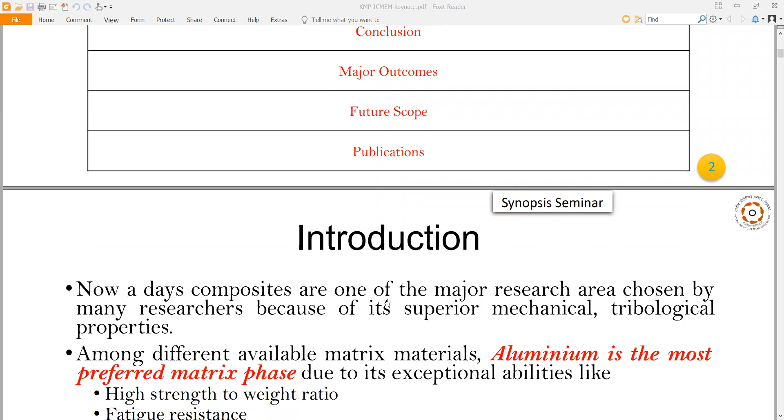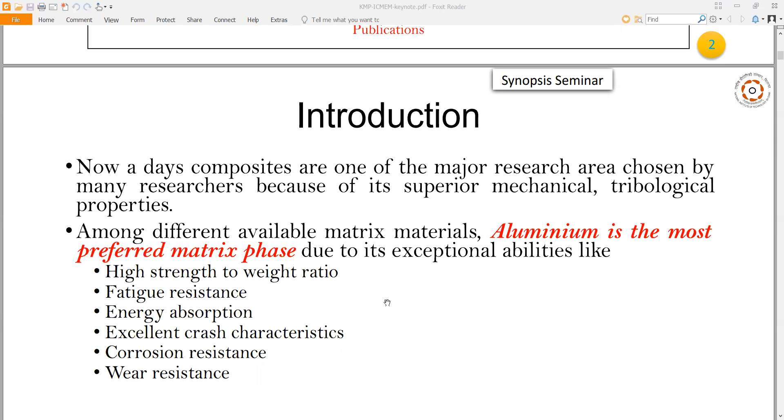In the introduction, nowadays composites are one of the major research areas chosen by many researchers because of their superior mechanical and tribological properties. Among different available matrix materials, aluminum is the most preferred matrix due to its exceptional abilities like high strength to weight ratio, fatigue resistance, energy absorption, excellent crash characteristics, corrosion resistance, and wear resistance.

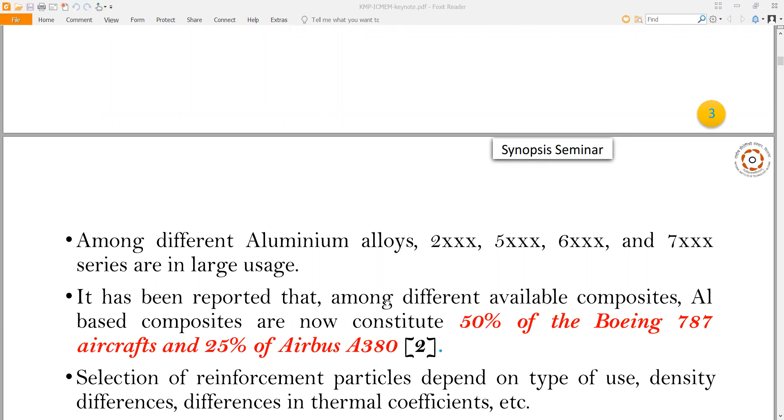Among different aluminum alloys, the 2XXX, 5XXX, 6XXX, and 7XXX series are in large usage. It has been reported that among different available composites, aluminum-based composites now constitute 50% of the Boeing 787 aircraft and 25% of Airbus A380.

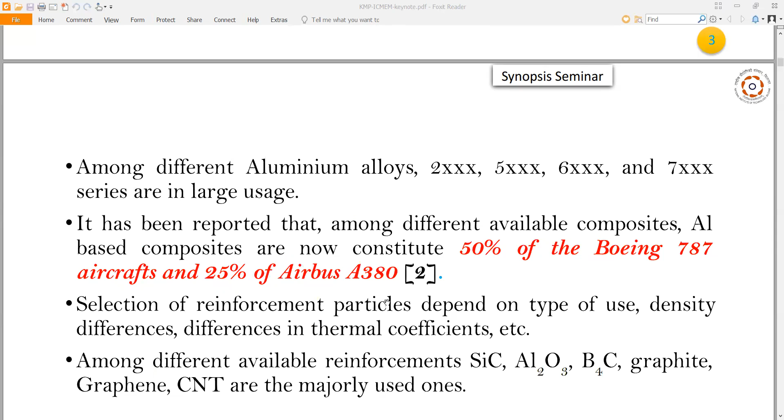Selection of reinforcement particles depends on type of use, density differences, differences in thermal coefficients, etc. Among different available reinforcements, silicon carbide, Al2O3, B4C, graphite, graphene, and CNT are the majorly used ones.

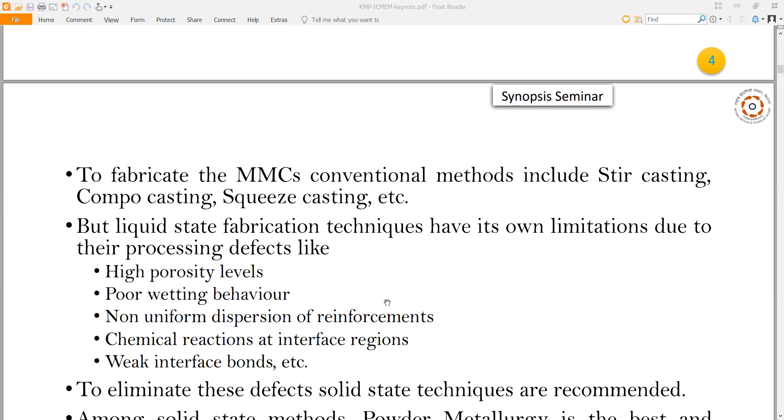To fabricate the MMC, that is metal matrix composites, conventional methods include stir casting, compo casting, squeeze casting, etc. But liquid state fabrication techniques have their own limitations due to processing defects like high porosity levels, poor wetting behavior, non-uniform dispersion of reinforcements, chemical reactions at interface regions, weak interface bonds, etc.

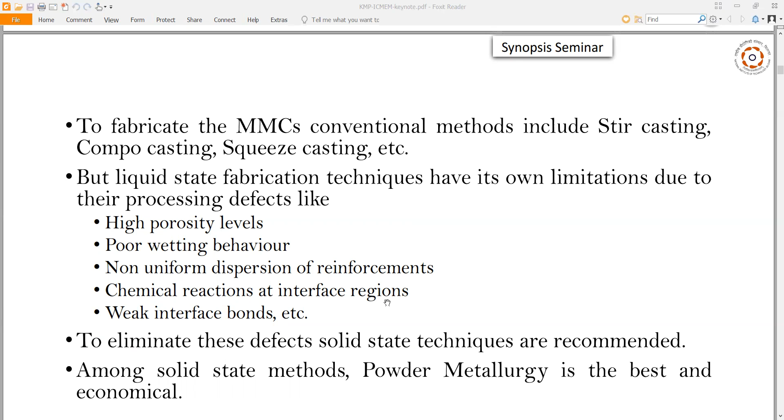To eliminate these defects, solid-state techniques are recommended, and among solid-state methods, powder metallurgy is the best and most economical. This work has recently been given as a synopsis seminar by one of my PhD students, and I am taking it as it is due to paucity of time, so I could not prepare separately. This is recent work, and I am presenting this to show what research we are doing now in our department.

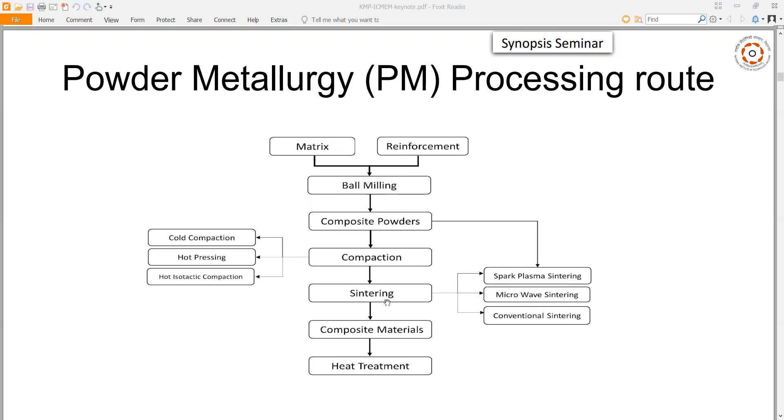Then powder metallurgy, that is the PM processing route. This diagram shows powder metallurgy: matrix, then reinforcement, then ball milling, then composite powder, then spark plasma sintering, microwave sintering, or conventional sintering, and compaction, then sintering, then composite material, then heat treatment. Cold compaction is there, hot pressing is there, then hot isostatic compaction is there.

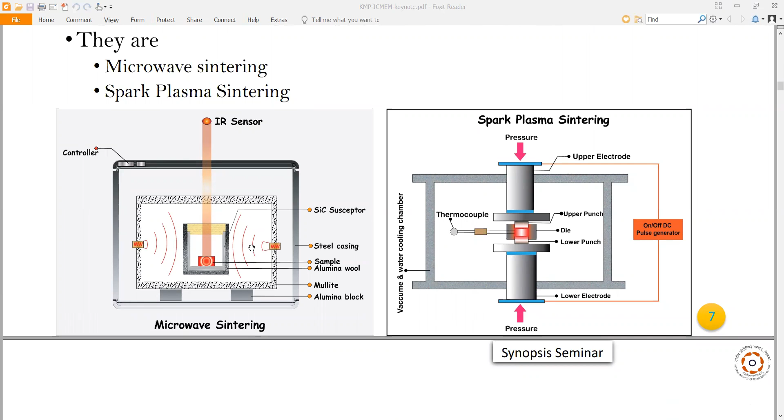Then non-conventional sintering mechanisms. To eliminate major defects in conventional sintering techniques, non-conventional sintering techniques will help effectively. They are microwave sintering and spark plasma sintering. This diagram shows microwave sintering, and this one shows spark plasma sintering.

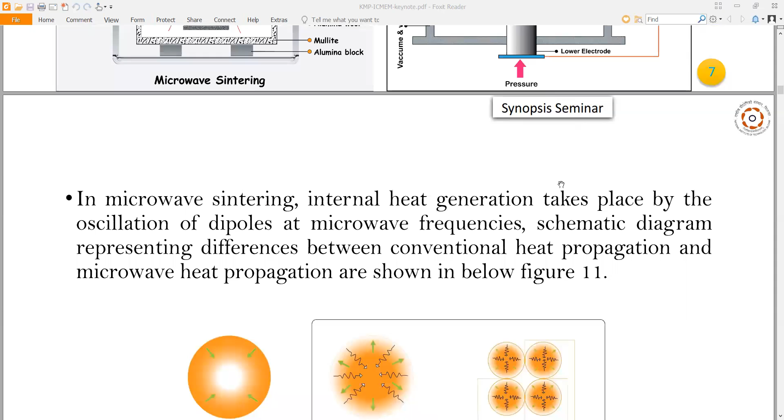In microwave sintering, internal heat generation takes place by the oscillation of dipoles at microwave frequencies. A schematic diagram representing differences between conventional heat propagation and microwave heat propagation is shown in figure 11 below. You can see it very well.

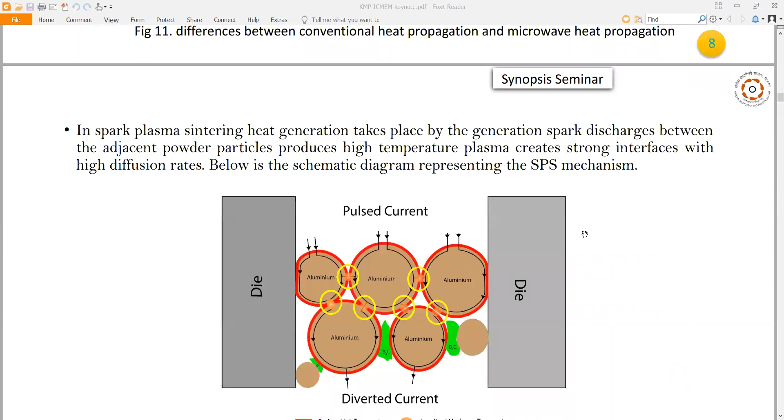In spark plasma sintering, heat generation takes place by spark discharges between adjacent powder particles, producing high temperature plasma and creating strong interfaces with high diffusion rates. Below is the schematic diagram representing spark plasma sintering, showing pulse current, die, and diverted current.

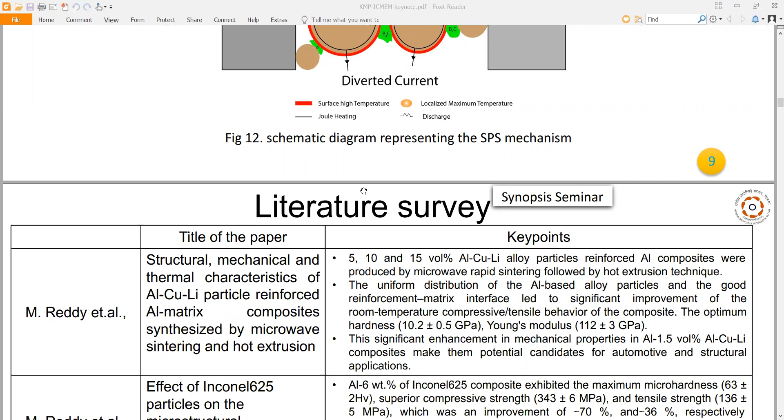Then literature survey. This is all about the literature review we have done. There is a lot of literature available in this area, so I will skip and not speak about all this because the audience will feel bored. All of it is available at sciencedirect.com, so I will be happy to skip this thing.

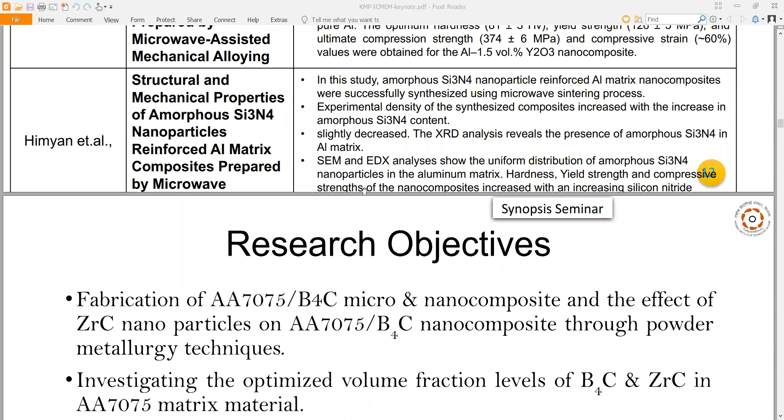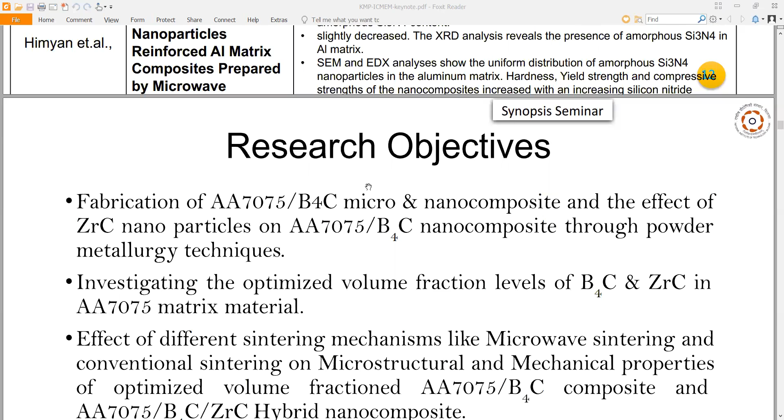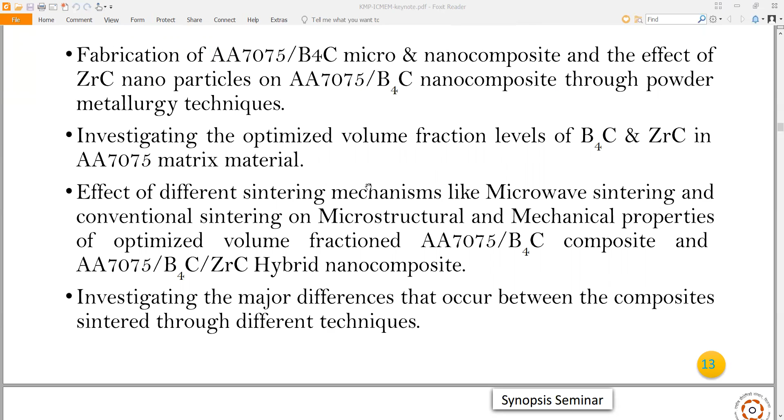Our research objectives are as follows: fabrication of AA7075/B4C micro and nano composite, and the effect of ZrC nanoparticles on AA7075/boron carbide nano composite through powder metallurgy technique; investigating the optimized volume fraction level of B4C and ZRC in AA7075 matrix material; effect of different sintering mechanisms like microwave sintering and conventional sintering on microstructural and mechanical properties of optimized volume fraction AA7075/B4C composite and AA7075/B4C/zirconium carbide hybrid nano composite; and investigating the major differences that occur between composites sintered through different techniques.

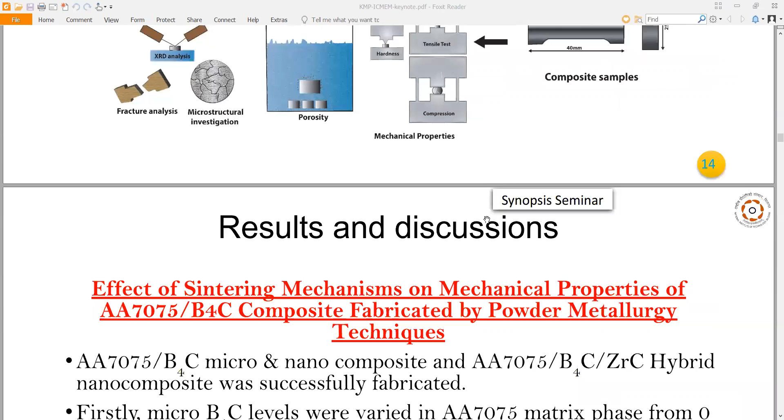Then research methodology: ball milling, cold compaction, microwave sintering, composite samples, mechanical properties, porosity, fracture analysis, and microstructural investigation. And this is about results and discussion.

So for results and discussion, we should first discuss the effect of sintering mechanism on mechanical properties of AA7075 B4C composite fabricated by powder metallurgy techniques.

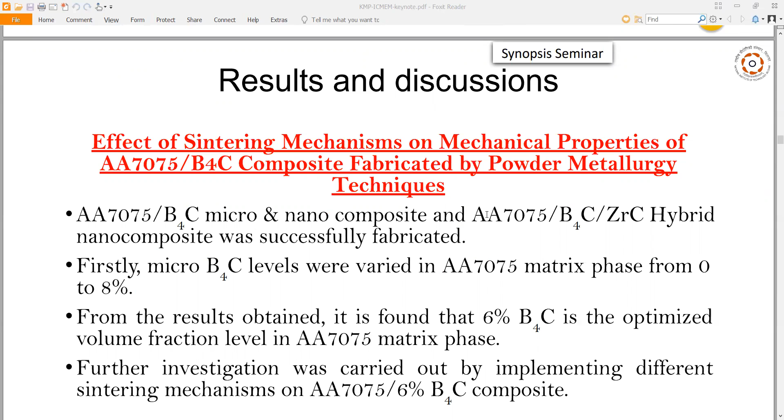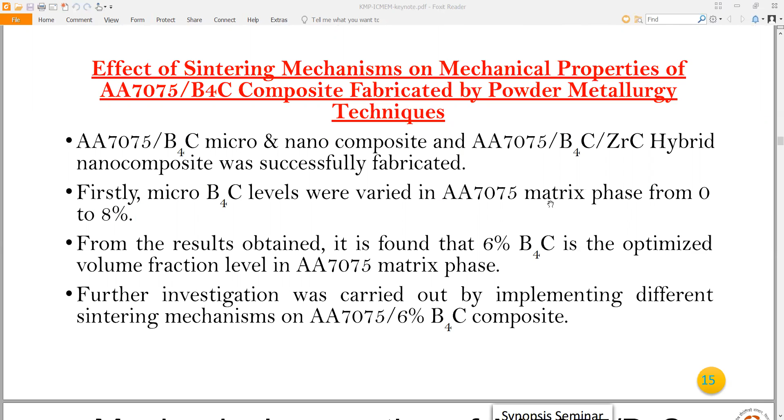AA7075 B4C micro and nano composite and AA7075 B4C ZrC hybrid nanocomposites were successfully fabricated. Firstly, micro B4C levels were varied in AA7075 matrix phase from 0 to 8%. From the results obtained, it was found that 6% B4C is the optimized volume fraction level in the AA7075 matrix phase.

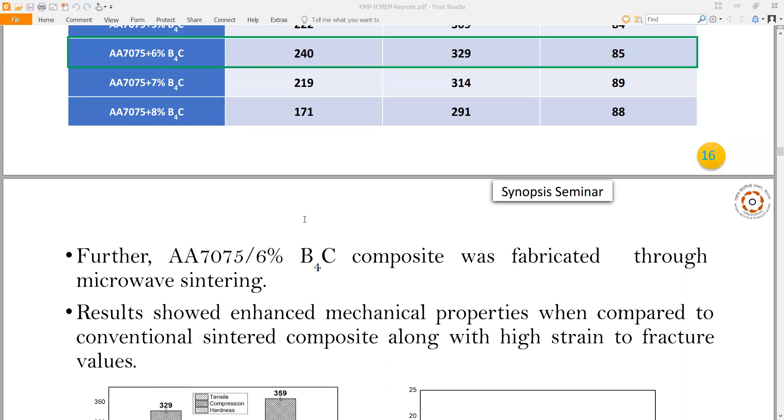Further investigation was carried out by implementing different sintering mechanisms on AA7075 6% B4C composite. We can see the name of the composite, tensile properties in MPa, compression properties in MPa, and hardness. The composite was fabricated through microwave sintering and results showed enhanced mechanical properties compared to conventionally sintered composite, along with a high strain to fracture value.

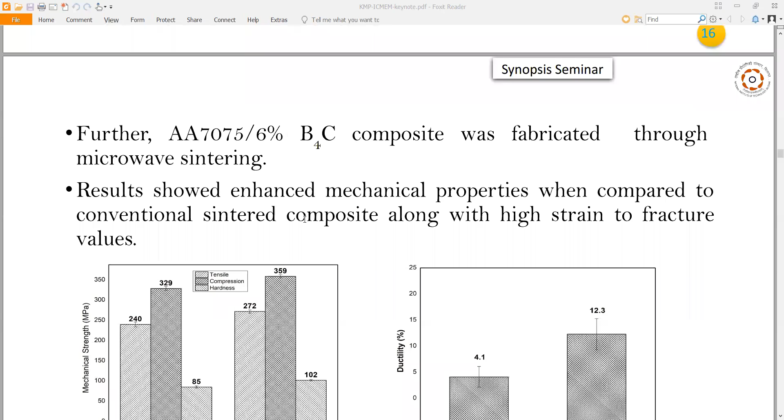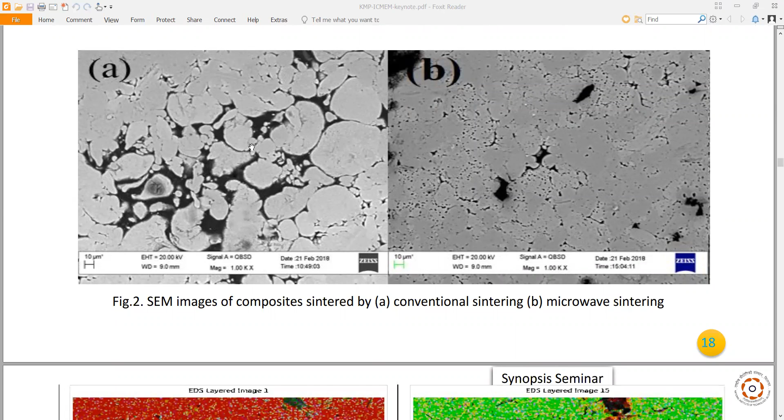Here we can see the diagram showing SEM images of the composite sintered by conventional sintering and microwave sintering. This is conventional sintering and this is microwave sintering.

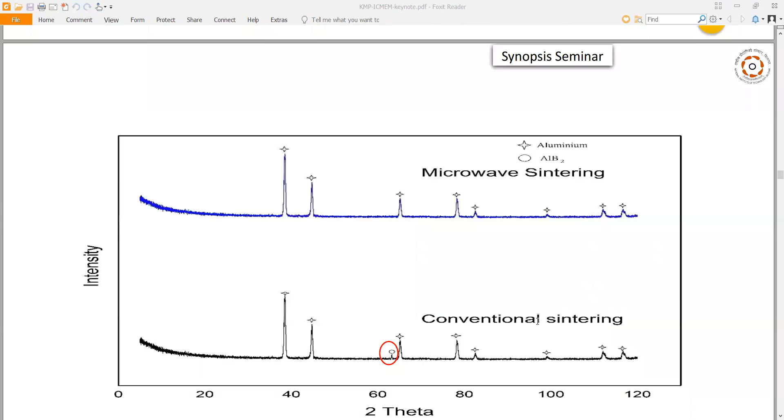This is XRD analysis of composites sintered by two different techniques. Here is the conventionally sintered product and here is the microwave sintered product.

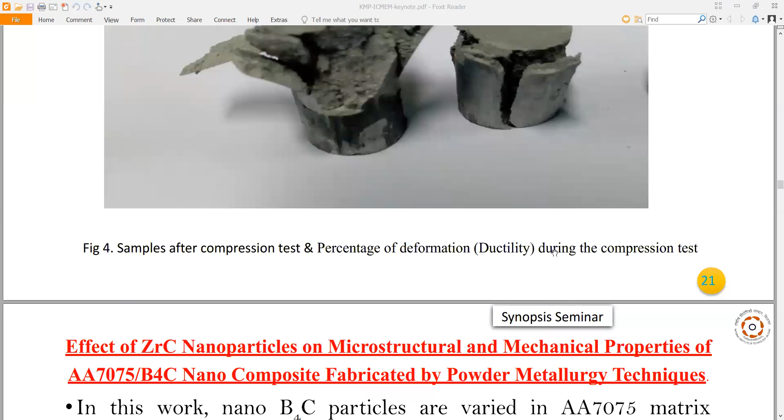This is figure 4, showing samples after the compression test and the percentage of deformation ductility during the compression test.

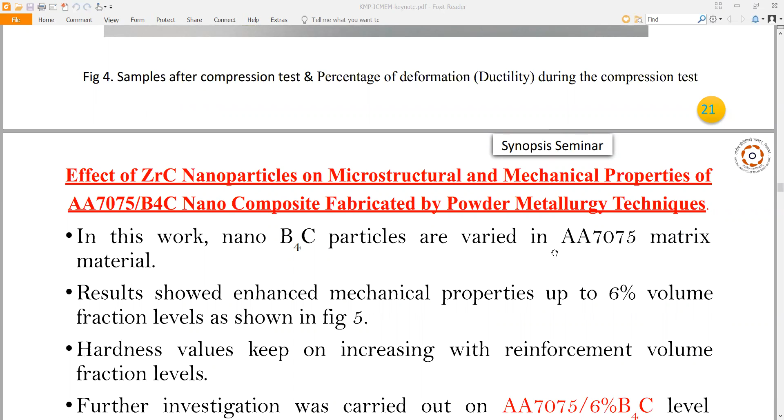Next we studied the effect of ZrC nanoparticles on microstructural and mechanical properties of AA7075 B4C nanocomposite fabricated by powder metallurgy technique. In this work, nano B4C particles were varied in the AA7075 matrix material.

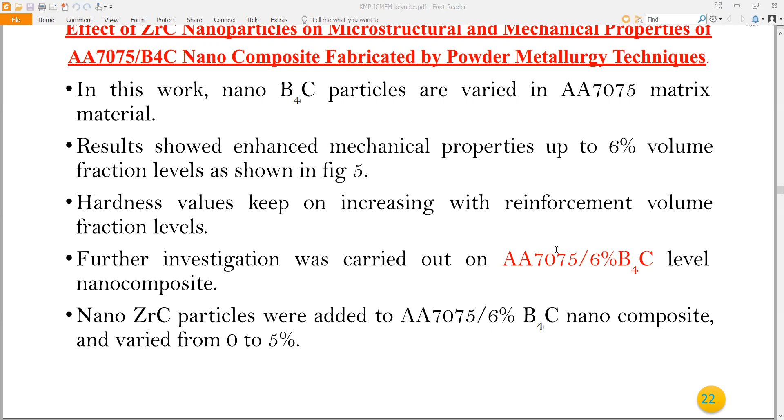Results showed enhanced mechanical properties up to 6% volume fraction level as shown in figure 5. Hardness value kept on increasing with reinforcement volume fraction level. Further investigation was carried out on the AA7075 6% B4C level composite, and nano ZrC particles were added to AA7075 6% B4C nanocomposite, varied from 0 to 5%.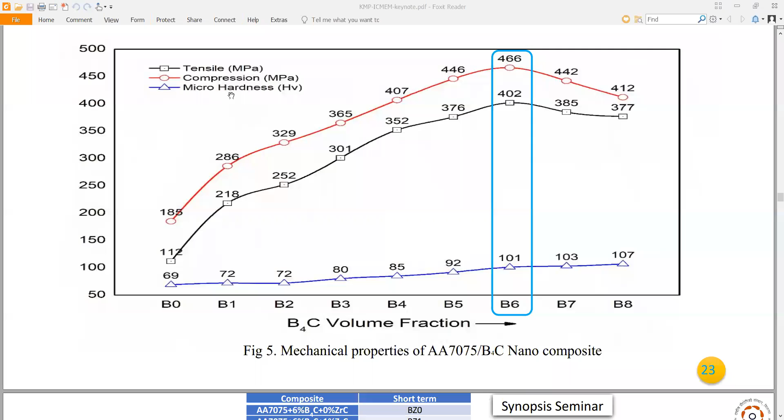This is shown with this blue color. Here also these composites are shown, with compressive and tensile strength versus zirconium carbide volume fraction of the composite shown here.

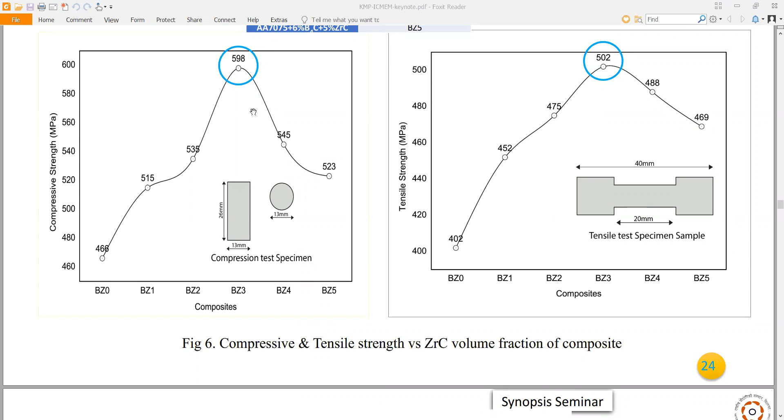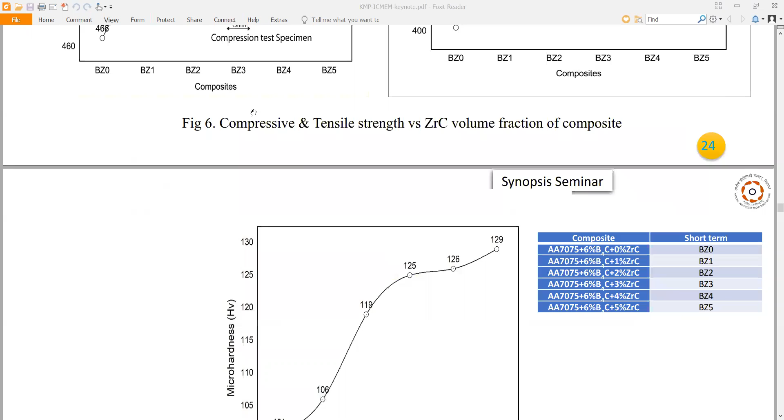Then this is the short term name of the composite that has been used, and this is about micro hardness versus zirconium carbide volume fraction of the composite.

So what is the conclusion? We have arrived that micro hardness keeps on increasing with ZrC volume fraction.

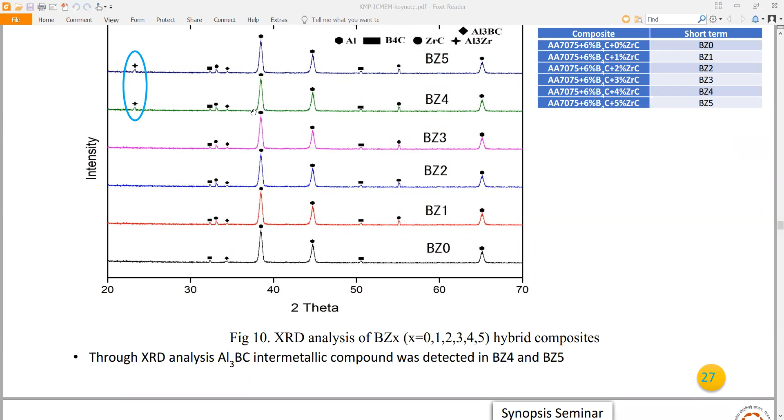This is figure 10, the XRD analysis of B-Z-X, where X is equal to 0, 1, 2, 3, 4, 5 percent, for the hybrid composites. From the XRD analysis, Al3BC intermetallic compound was detected in BZ4 and BZ5.

This is the fractographic analysis. Here we can see the fracture surfaces of AA7075 plus 6% B4C plus X% ZrC hybrid nanocomposites, where X is equal to 1, 2, and 3.

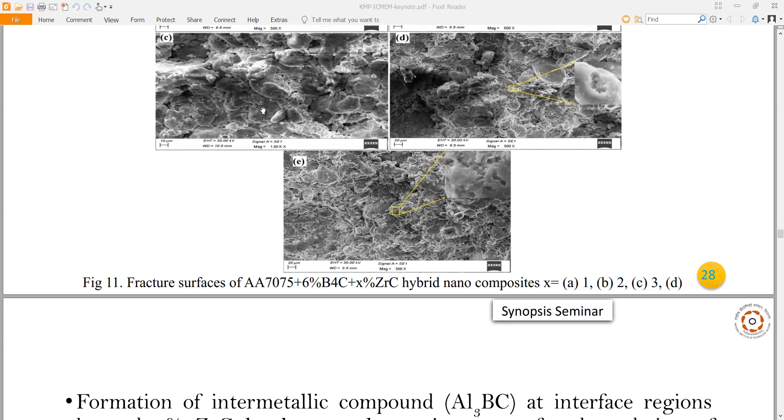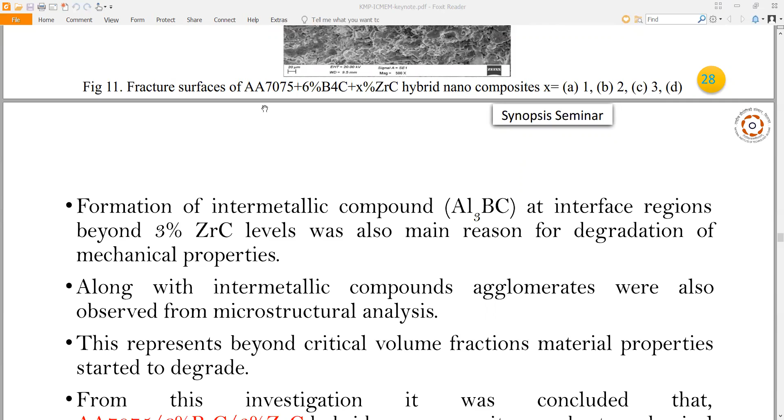We see the formation of intermetallic compound Al3BC at interface regions beyond 3% ZrC levels was the main reason for degradation of mechanical properties. Along with intermetallic compounds, agglomerates were also observed from microstructural analysis. This represents that beyond the critical volume fraction, material properties start to degrade.

From this investigation, it was concluded that AA7075 6% B4C, 3% ZrC hybrid nanocomposite gave the best mechanical properties. So we concluded like this.

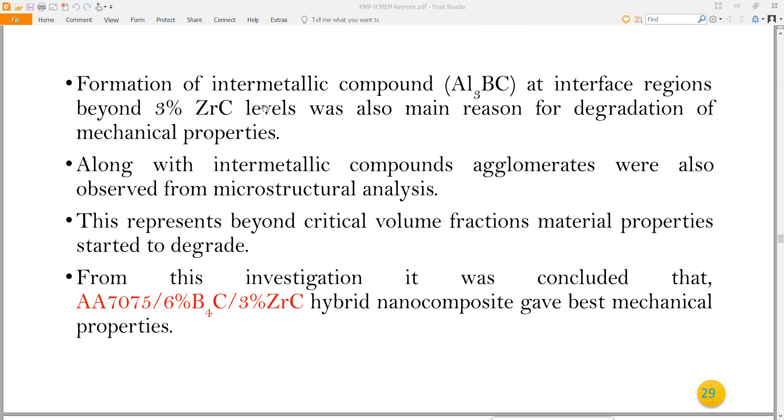Then the third objective was the effect of microwave sintering on the microstructure and mechanical properties of AA7075 B4C ZrC hybrid nanocomposite fabricated by powder metallurgy techniques.

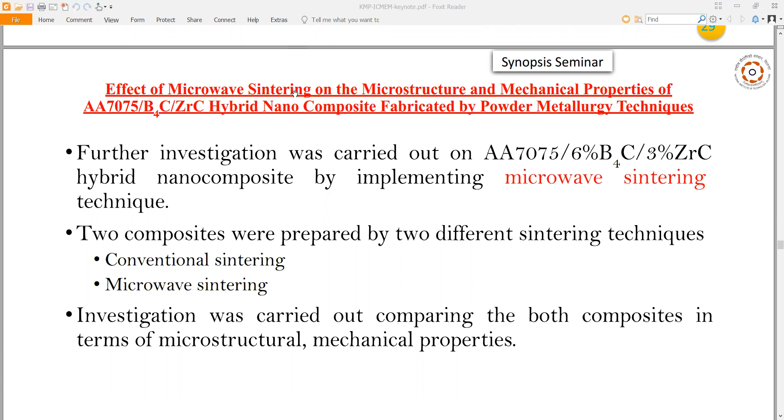Here, further investigation was carried out on this hybrid nanocomposite by implementing microwave sintering technique, and two composites were prepared by two different sintering techniques: conventional sintering and microwave sintering. Investigation was carried out comparing both composites in terms of microstructural and mechanical properties.

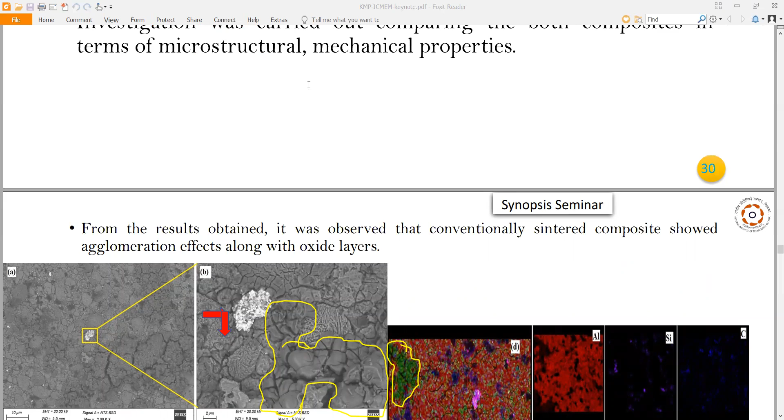From the results obtained, it was observed that conventionally sintered composites showed an agglomeration effect along with oxide layers, which we can see from the figures, specifically figure 12.

These are SEM images. A is the conventionally sintered composite, B is the magnification image of the yellow spot from image 5A, and C shows agglomeration of ZrC and dispersion of B4C.

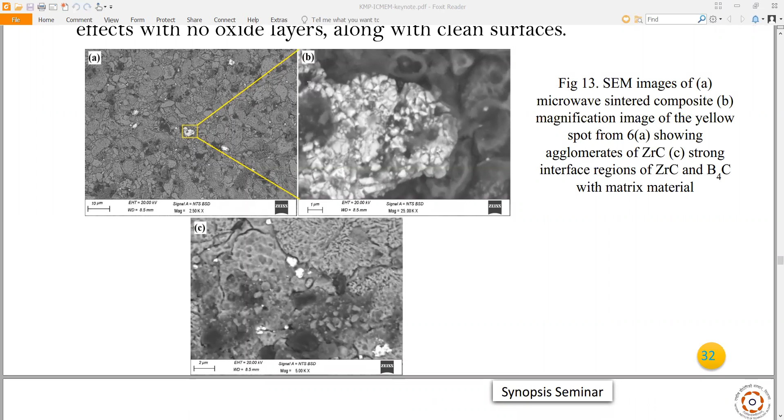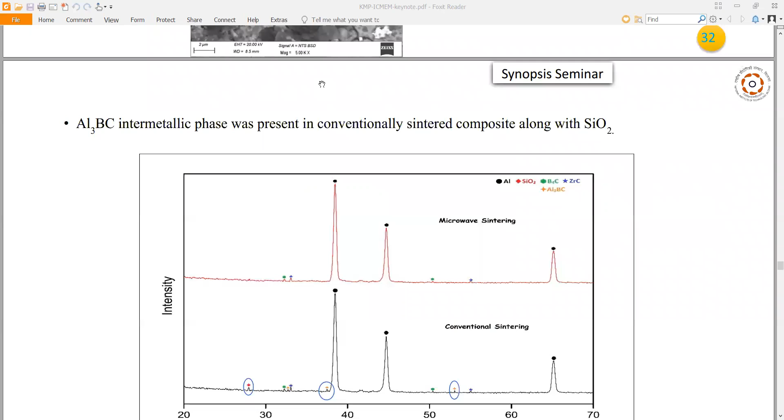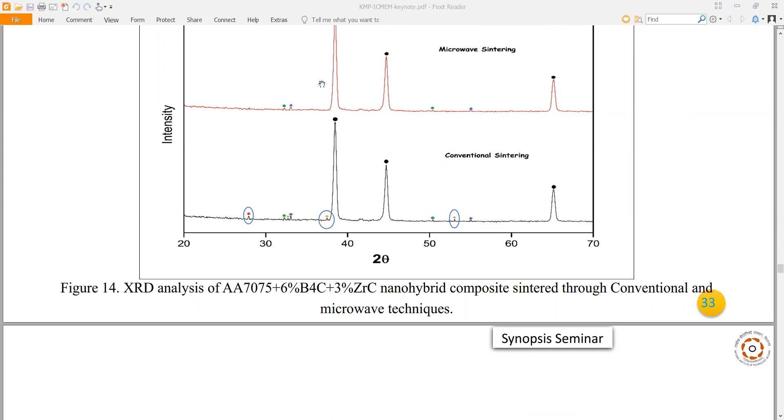This is the diagram, figure 14. This is the XRD analysis of AA7075 plus 6% B4C plus 3% zirconium carbide nanohybrid composite, sintered through conventional and microwave techniques.

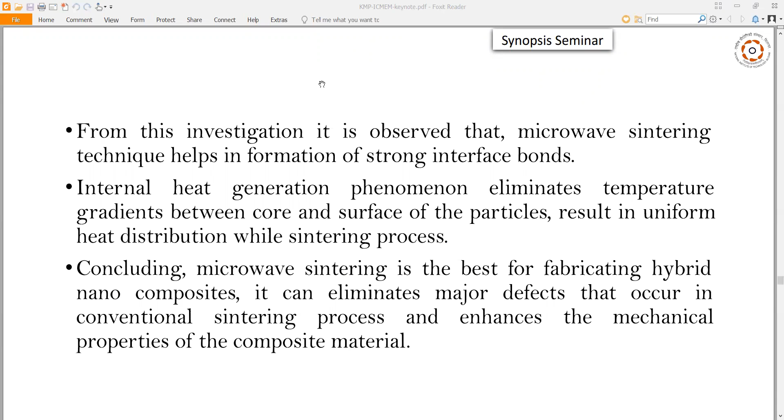It can eliminate major defects that occur in conventional sintering process and enhances the mechanical properties of the composite material. Now this is about comparative analysis of fabricated composites.

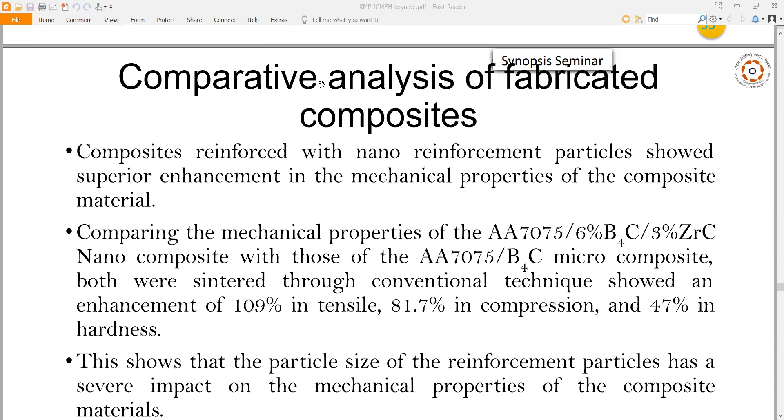Composites reinforced with nano-reinforcement particles showed superior enhancement in the mechanical properties of the composite material. Comparing the mechanical properties of AA7075, 6% B4C, 3% ZrC nanocomposite with those of the AA7075 B4C microcomposite, both sintered through conventional technique, showed an enhancement of 109% in tensile.

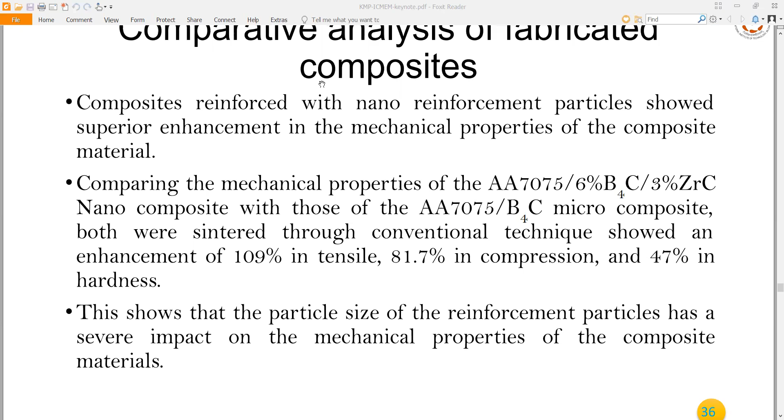81.7% in compression, and 47% in hardness. This showed that the particle size of the reinforcement particle has a severe impact on the mechanical properties of the composite materials.

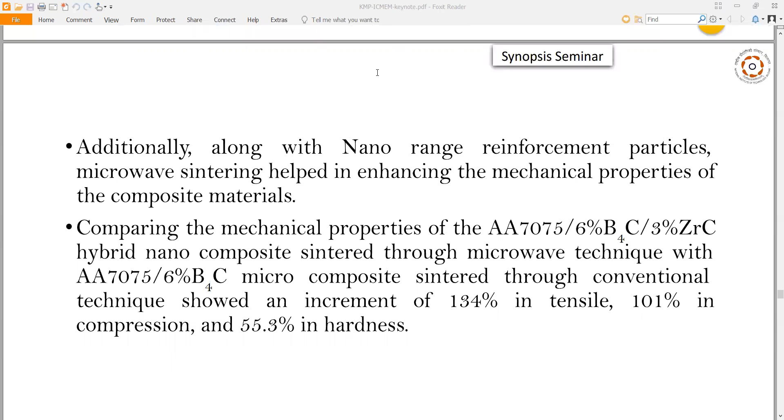Additionally, along with nano-range reinforcement particles, microwave sintering helps in enhancing the mechanical properties of the composite materials. Comparing the mechanical properties of AA7075, 6% B4C, 3% ZrC hybrid nanocomposite sintered through microwave technique with AA7075, 6% B4C microcomposite sintered through conventional technique showed an increment

of 134% in tensile, 101% in compression, and 55.3% in hardness.

The main disadvantage is that composite materials have low ductility nature after reinforcing with high reinforcement content levels.

The present investigation showed that enhanced ductility levels can be achieved by implementing advanced sintering mechanisms like microwave sintering with nano-range reinforcements. Comparing the ductility levels of fabricated composites,

AA7075 B4C ZrC hybrid nanocomposite sintered through microwave technique showed strain to fracture value of 12.2%, while AA7075 B4C microcomposite sintered through conventional technique showed a strain to fracture value of only 4.1%.

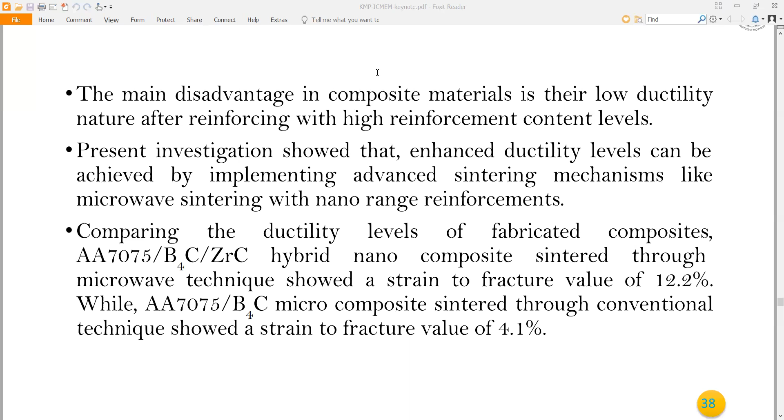So we are getting a large difference. In one place it is 12.2%, and in the other place it is only 4.1%.

These are the diagrams of tensile strength in MPa, compression strength in MPa, and hardness in MPa. This shows the ductility level of composites fabricated in the present work.

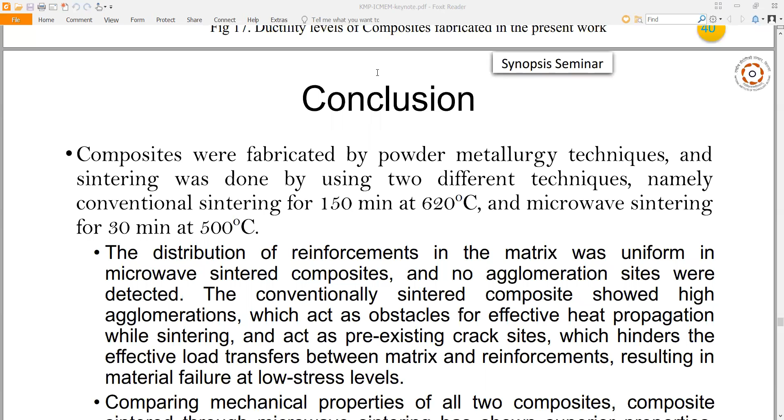In conclusion, now we present the conclusion of our whole work. Composites were fabricated by powder metallurgy techniques, and sintering was done using two different techniques: conventional sintering for 150 minutes at 620 degrees centigrade, and microwave sintering for 30 minutes at 500 degrees centigrade.

The distribution of reinforcement in the matrix was uniform in microwave sintered composites, and no agglomeration sites were detected. The conventionally sintered composites showed high agglomerations which act as obstacles for effective heat propagation during sintering,

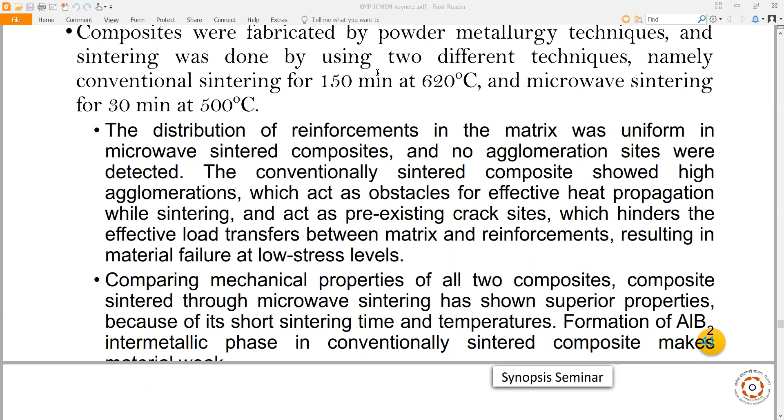and act as pre-existing crack sites, which hinder the effective load transfer between matrix and reinforcements, resulting in material failure at low stress levels.

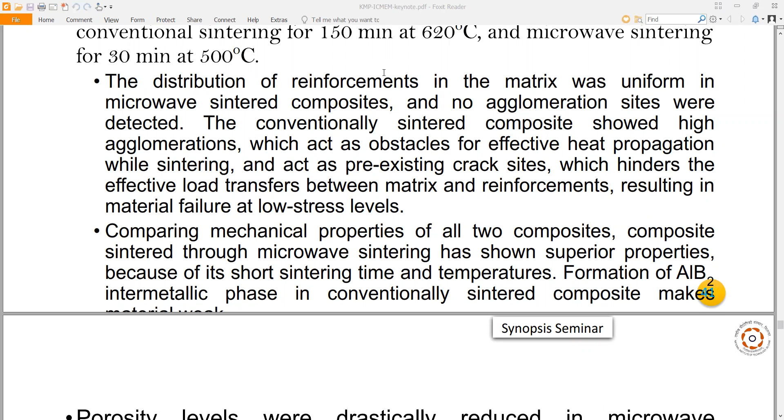Comparing mechanical properties of the two composites, the composite sintered through microwave sintering showed superior properties because of its short sintering time and temperature. Formation of AlB2 intermetallic phase in the conventionally sintered composite makes it inferior.

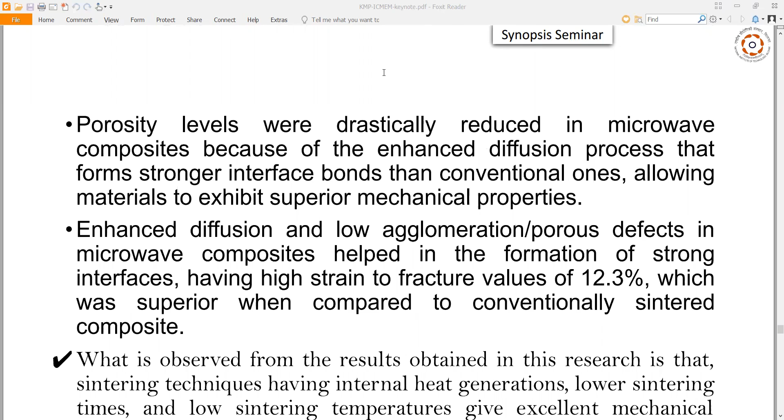Porosity levels were drastically reduced in microwave composites because of the enhanced diffusion process, which forms a stronger interface bond than in conventional ones, allowing materials to exhibit superior mechanical properties.

Enhanced diffusion and low agglomeration porous defects in microwave composites helped in the formation of strong interfaces, having high strain to fracture values of 12.3%, which was superior compared to the conventionally sintered composite.

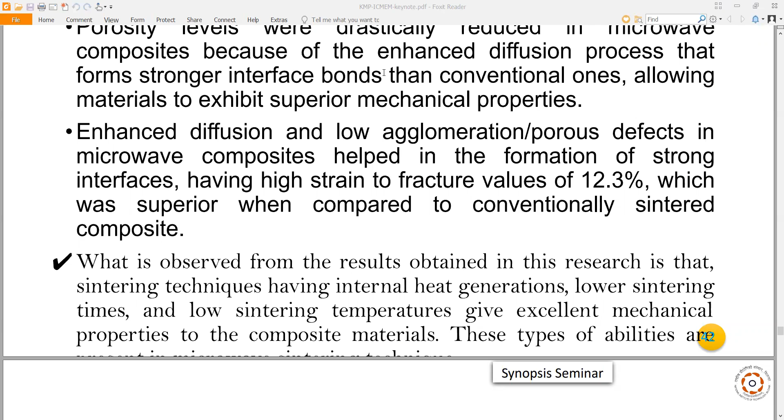What is observed from the results obtained in this research is that sintering techniques having internal heat generation, lower sintering times, and lower sintering temperatures give excellent mechanical properties to the composite materials.

AA7075/B4C/ZrC hybrid nanocomposite was fabricated through powder metallurgy techniques to investigate the impact of nano ZrC particles on microstructural and mechanical properties at the optimized volume fraction.

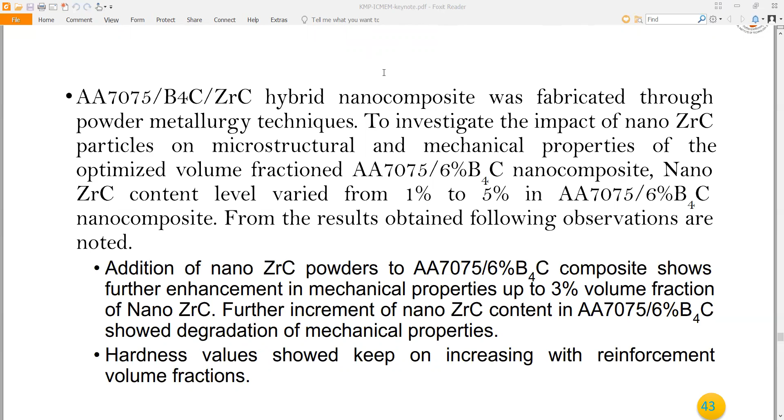In the AA7075/6% B4C nanocomposite, nano ZrC content level varies from 1% to 5%. From the results obtained, the following observations were noted.

With addition of nano ZrC powders to these composites, there is further enhancement in mechanical properties up to 3% volume fraction of nano ZrC.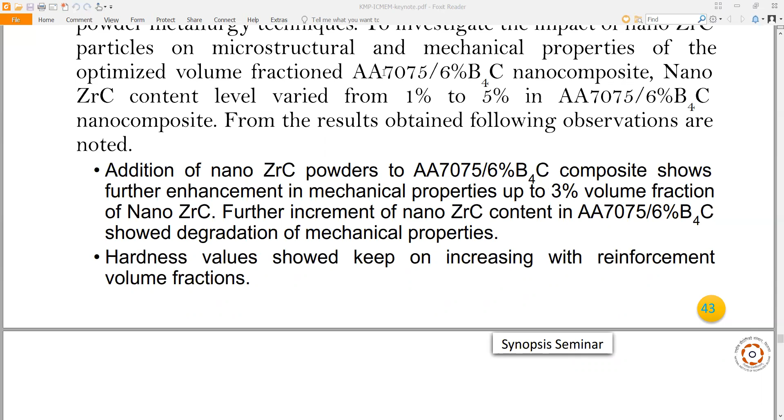Further increment of nano ZrC content in AA7075 6% boron carbide showed degradation of mechanical properties. Hardness values, however, kept on increasing with reinforcement volume fraction.

Next, microstructural analysis revealed that the distribution of nano reinforcement was uniform up to 3% ZRC content level, and further increase in nano ZRC level showed agglomerations of ZRC particles.

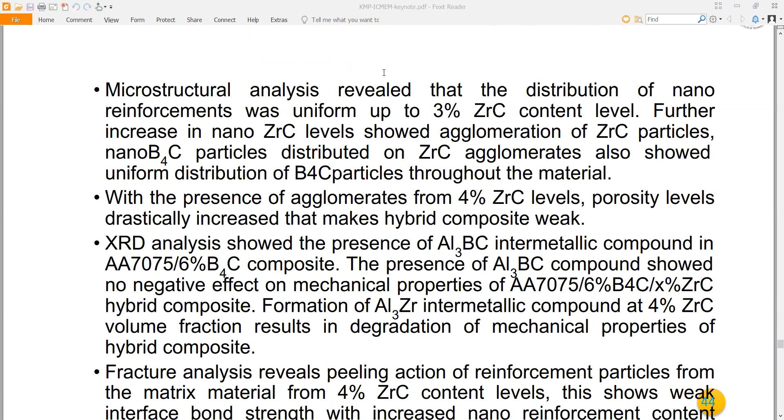Nano B4C particles distributed on ZRC agglomerates also showed uniform distribution of B4C particles throughout the material. With the presence of agglomerates from 4% ZRC level, porosity level drastically increased, making the hybrid composite weak.

XRD analysis showed the presence of Al3BC intermetallic compound in AA7075/6% B4C composite. The presence of Al3BC compound showed no negative effect on mechanical properties.

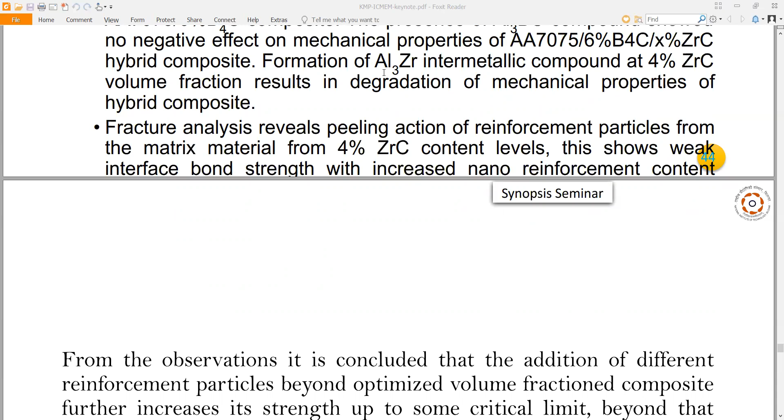Formation of Al3ZR intermetallic compound at 4% ZRC volume results in degradation of mechanical properties of the hybrid composite, but this happens at 4% ZRC. Fracture analysis reveals peeling action of reinforcement particles from the matrix material from 4% ZRC content levels onward.

From the observation, it is concluded that the addition of different reinforcement particles beyond the optimized volume fraction increases composite strength up to some critical limit. Beyond that, composites show agglomerates with high porosity levels along with new intermetallic compounds and weak interface bonds that ultimately degrade the mechanical properties of the hybrid composite.

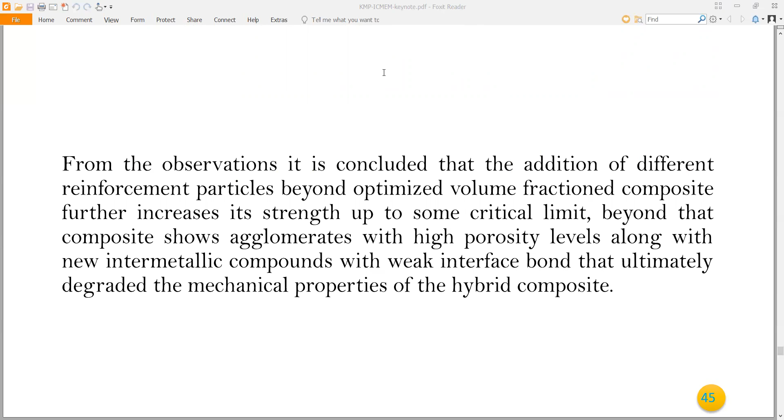AA7075 with 6% B4C and 3% ZRC nano hybrid composites, sintered through conventional and microwave techniques, were fabricated successfully. Various characterizations were performed to find out the advantage of microwave sintering over conventional sintering, and below are the novel findings from the research work.

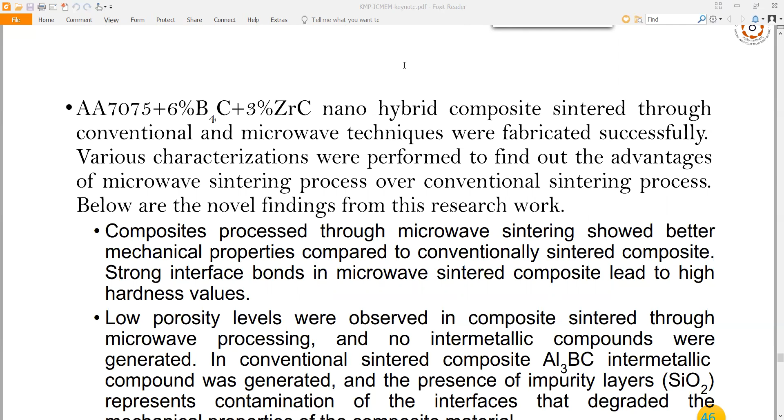Composites processed through microwave sintering showed better mechanical properties compared to conventionally sintered composites. Strong interface bonds in the microwave sintered composite led to high hardness values, and low porosity levels were observed in the composite sintered through microwave processing. No intermetallic compounds were generated. In the conventionally sintered composite,

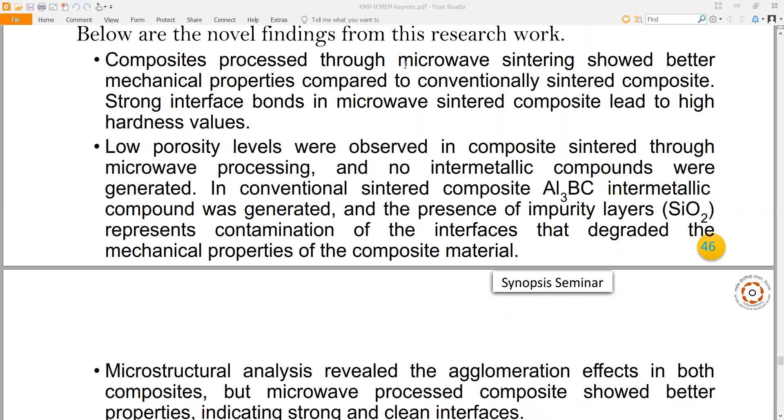Al3BC intermetallic compound was generated, and the presence of impurity layers, SiO2, represents contamination of the interfaces that degraded the mechanical properties of the composite material.

Microstructural analysis revealed agglomeration effects in both composites, but microwave processed composites showed better properties, indicating strong and clean interfaces. No peeling action of reinforcement particles from the matrix material was detected in either composite, as shown through SEM fractography analysis.

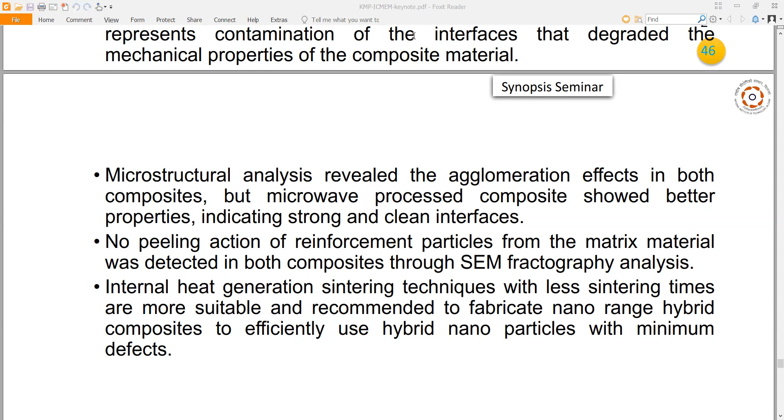Internal heat generation sintering techniques with less sintering time are more suitable and recommended to fabricate nano-range hybrid composites, to efficiently use hybrid nanoparticles with minimum defects.

The major outcomes from the present investigation are as follows: compared to composites reinforced with micro-level reinforcement, composites reinforced with nano-range reinforcement showed superior advancement in mechanical properties.

Microwave sintering helps enhance the properties of composite materials compared to conventional sintering because of its unique features like internal heat generation, low sintering time, and low sintering temperatures.

It is observed that in microwave sintered composites, no intermetallic compounds were detected, representing clean and strong interfaces. From the overall investigation, it is concluded that microwave sintering is the best suited technique for fabrication of hybrid nanocomposites, where there is a high chance of formation of intermetallic compounds.

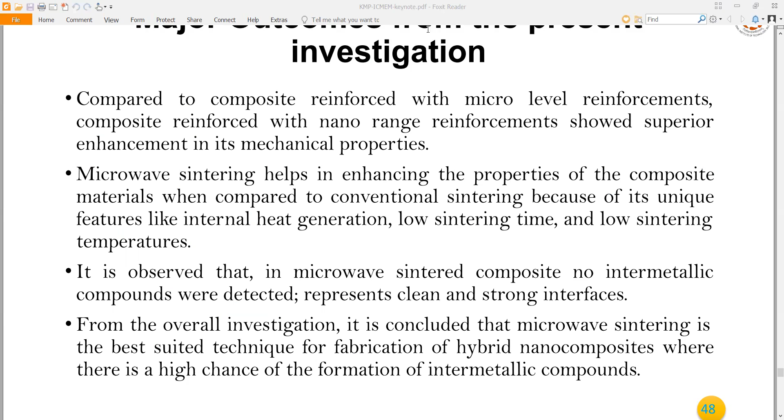These are the publications from our research work. I was the main guide of the student, and Dr. S.R. Maity, assistant professor in our department, was the joint supervisor on this project.

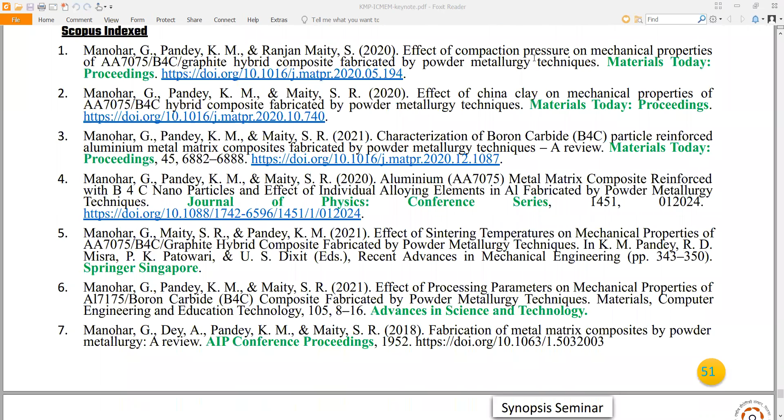I believe that this is good work, and these are the conferences where the papers were presented.